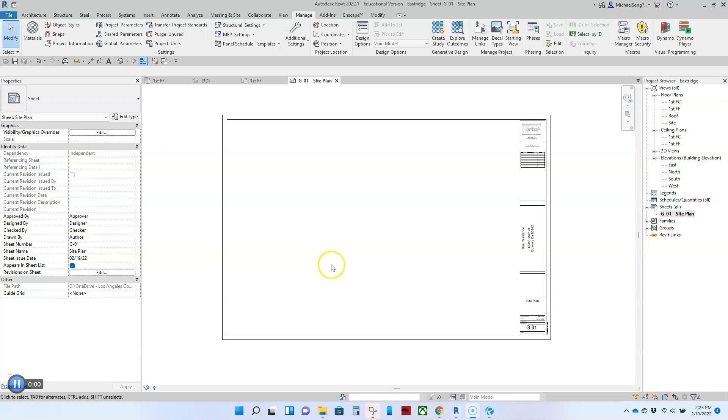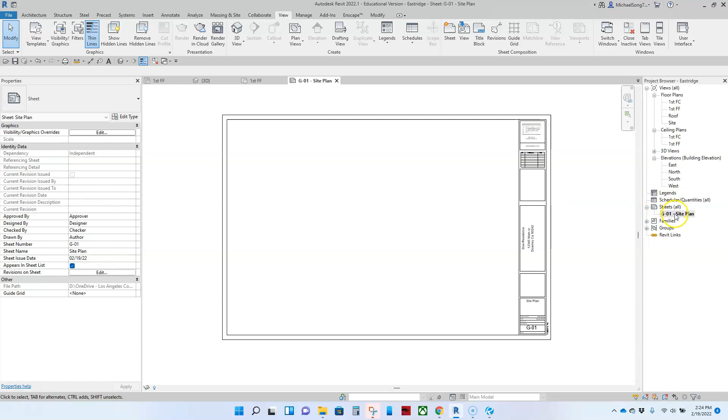All right guys, before we go further, let's get more sheets here because a typical architectural project is going to have 10 to 15 sheets of paper. Instead of having to go to View, Sheet, and then load a title block over and over again, we've already done it. So you just right click here and go to duplicate with detailing, or empty sheets. What detailing does is if you have other drawings in here, it'll duplicate that too, but you don't want that anyway.

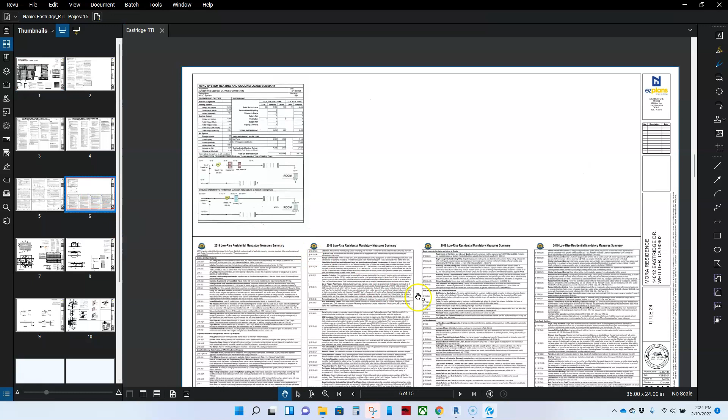So it's just populating G1, G2, G3, G4. I think typically here, if you look at our title block or the sample drawings I gave you, how many G series do I have? Yeah, I have like G1, 2, 3, 4, 5, 6. I have like 6 G series sheets. So let me create a few more.

What's really nice doing it this way is that the numbers go sequentially, right? 1, 2, 3, 4, 5. And of course, I can change the name of the sheet, which I'll do at another time. But now I have 6 new sheets. Let me actually go back here.

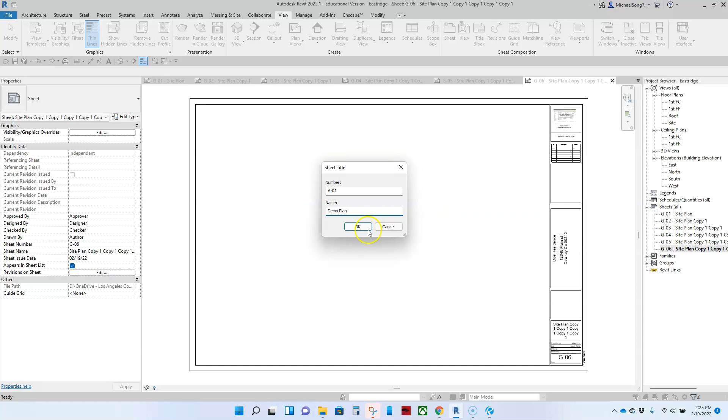I'm going to rename that, and then the architectural series will start as A01, A02. And then that might be a demo plan. Of course, the names are all interchangeable. So you got the A series here, and again I can just start to duplicate that. So you got A02 — at least it starts off some of my work. 2, 1, 2, 3, 4, 5, 6.

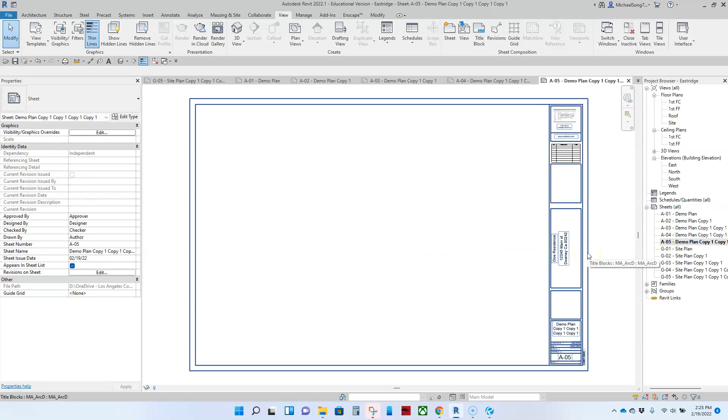All right, enough of that. And I guess we'll add more sheets as necessary for this particular project.

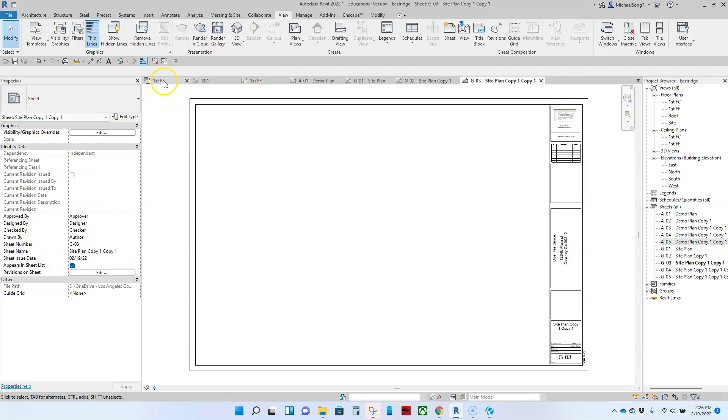Oh man, all my sheets are open. Oh, so here's another shortcut — I now have a good, lots of sheets open here. This actually happens a lot in Revit because you're looking at multiple views, multiple sheets on the same project. If you get to a point where you have too many tabs or windows open, just select one window that you want to keep and hit this button here, which will close all the other views that you're not using. So then it just kind of closes them. But of course, you can reopen them again by clicking on them and so on.

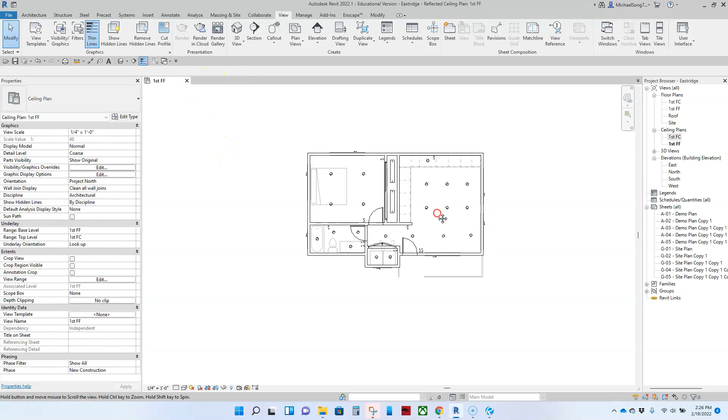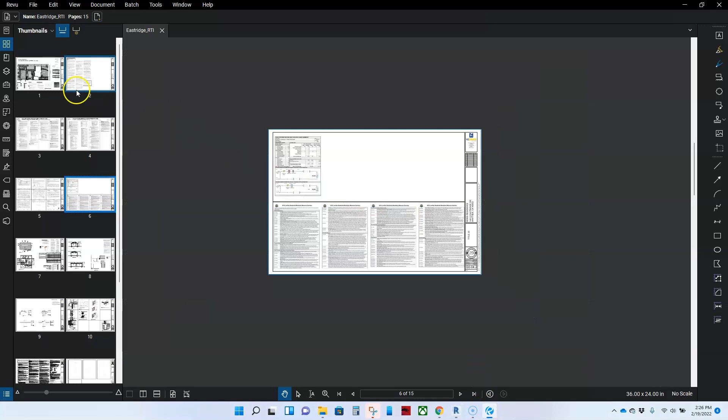All right, so let's continue on with our site plan here. This is where we're going to create our cover sheet, if you will. Let's look at our sample, and we want to try to mimic this. So we know we're going to have a site plan here, we're going to have the project title, the project address. But remember guys, we have the project title and project address here, and we don't want to have to repeat information, right? We don't want to have to copy paste things if we don't have to.

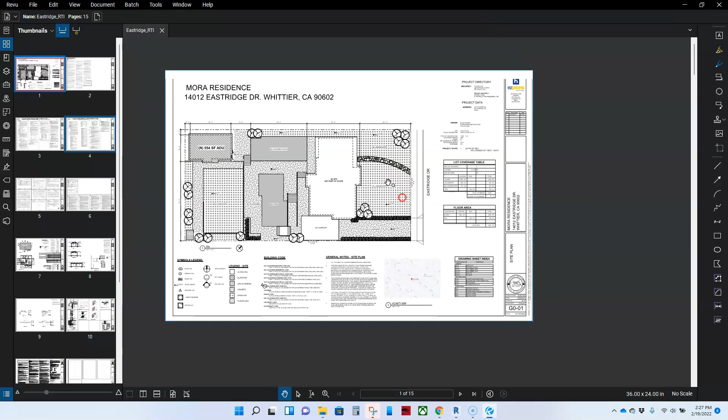So again, if I put in a label here, it'll be done automatically. Let's put a project title and project address here, but we don't want to retype it because the information is already there.

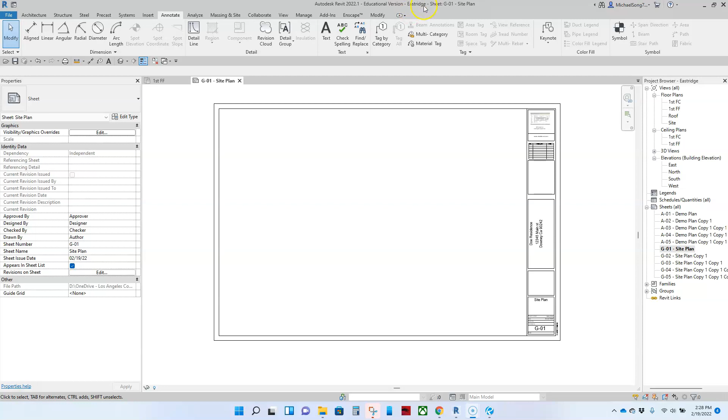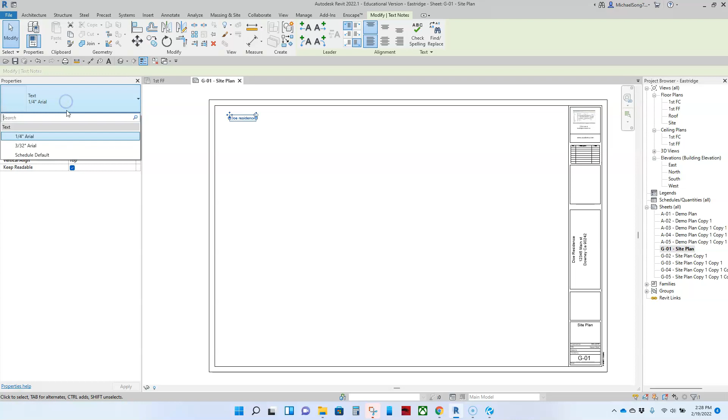But you notice on this file, we're at the actual project folder here. If I go to Annotate and go to Text, I don't have the ability to put a label, meaning that if that's the case, then I just got to type 'Doe Residence' and put it here. And if the text is too small, of course I could make the text bigger, which we should do in a second. But long story short, this is just regular text and I have to retype it, which is not a killer if I just have to do it on this one sheet.

But in an office, you might need a cover sheet on every project, and you don't want to have to retype things on every project. So the best thing to do is to have another title block. In my office, we have 2 different types of title block.

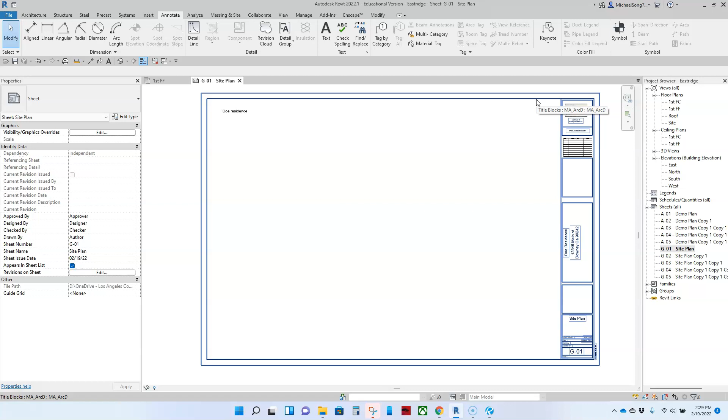We have a title block just for the cover sheet, and then we have a regular title block. So I'm going to now modify this to be my cover sheet title block.

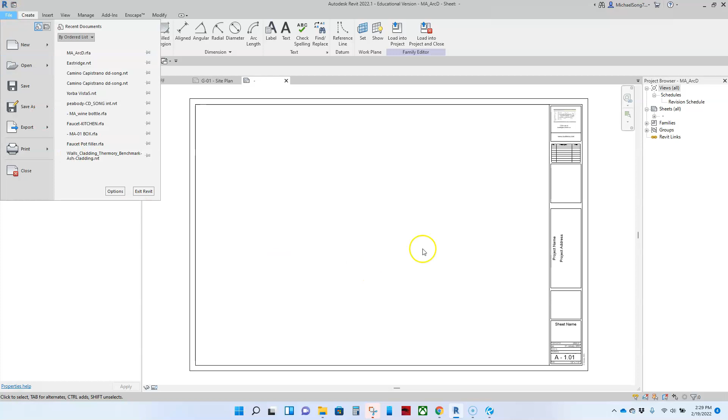All right, so let me erase this and stay with me, guys. So I'm going to click the title block. We're going to go to Edit Family. And what we're going to do is we're going to do a Save As right away because I don't want to affect this title block. Let me get out again and take it slow. Again, this title block, which is MA-ARC-D, all my sheets have that title block, MA-ARC-D. So if I make a change into this title block, all of these things will change, right?

So what I want to do is I want to take my MA-ARC-D title block and do a Save As. And I'll save it into my same custom families folder. And then this time I'll say MA-ARC-D underscore cover. All right, so this is a brand new family now, and it's not loaded onto my Eastridge project yet.

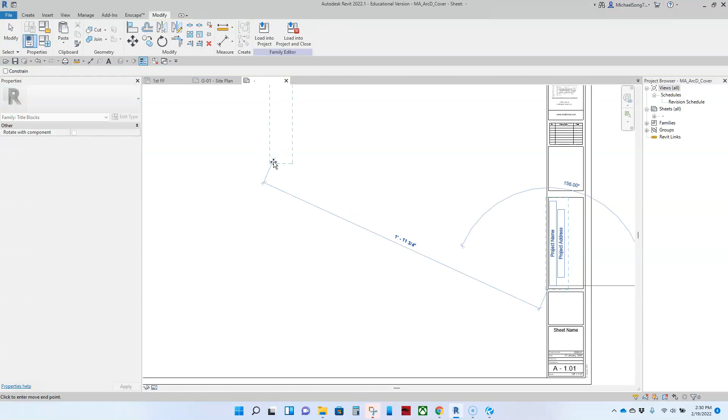So this is where I want to set it up so that this is the title block that I will use for my cover sheet. So I'm going to take this project name and project address here, Control C, and then Control V. I'm basically making a copy of it. I'm going to rotate this thing.

And I want my project name to show up here, my project address to show up here. And in this case, I want that label to be much larger. So right now it's at 1/4 inch, but maybe I want to show up really big, like 1/2 inch, right? So this is where we're going to also teach you how to add larger text or different text styles.

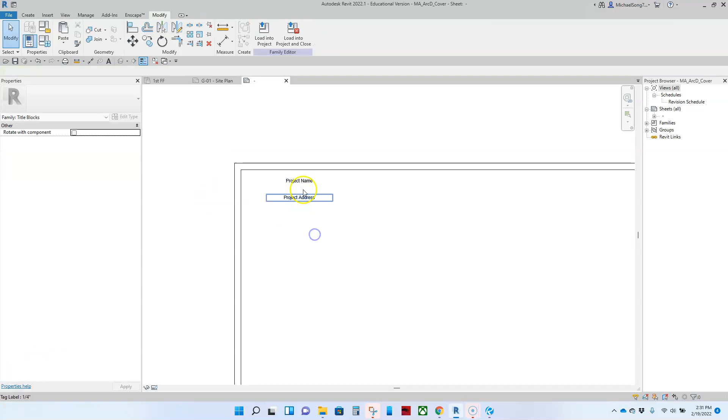So if you look at this label that I selected, right? And of course, if I go to edit here, it's asking me what information do I want to add to this label. I already have project name, so I don't want to change that, but I just want to make it bigger, the label, not the text. So if I click this, right now that label is called 1/4 inch. And then if I come down here, I can pick a label that's 1/8 of an inch, or 3/8, which is actually pretty big. But they don't have a 1/2 inch.

So we're going to create a 1/2 inch label. Well, how do we do that? You select the label, you go to edit type. So I want to select that, edit that label. And then I'm going to duplicate it. And I'm going to name this 1/2 inch, which in my mind represents 1/2 of an inch, the text size. Oop, my number lock was off. Sorry, guys.

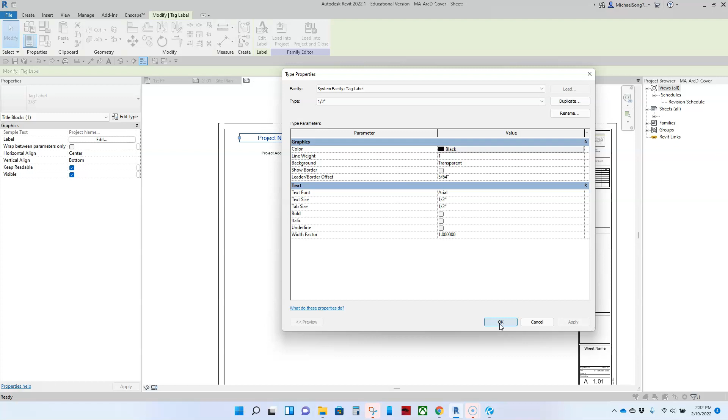And so what I'm telling Revit is that if I want this type of label, I want my text size to be 1/2. Right? So here's all the other labels that I have by default, right? 1/4 inch, 1/8 inch, 3/8. So if I go to 3/8, you'll see that changes to 3/8. If I go to 1/2, I just inputted 1/2, so I changed that to 1/2. All right? So I created a brand new label, and I'm making that label have a text size of 1/2 an inch tall.

So there it is. I have project name, project address. I want that to be a 1/2 inch also. And in this case, I want this guy to be left justified, and that guy also to be left justified. And I want my address to get along that way, and we're good to go.

All right, so let's just take it one step at a time. And at this time, I'm not going to close it because I know I'm going to come back to this and edit it further. So I'm just simply going to load it onto our project.

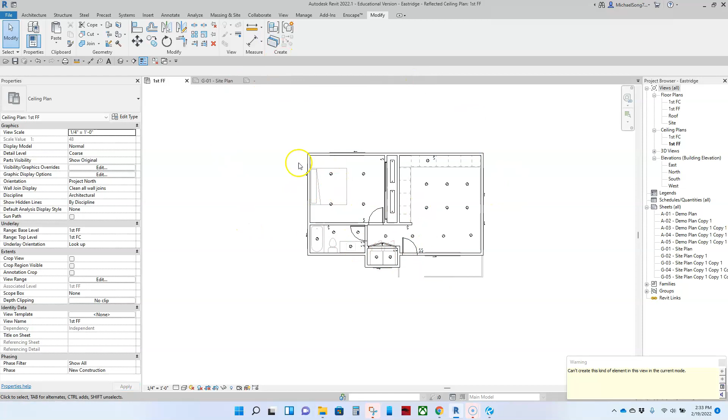It should be in my sheet view, not my model view. All right, so here it is, on this one.

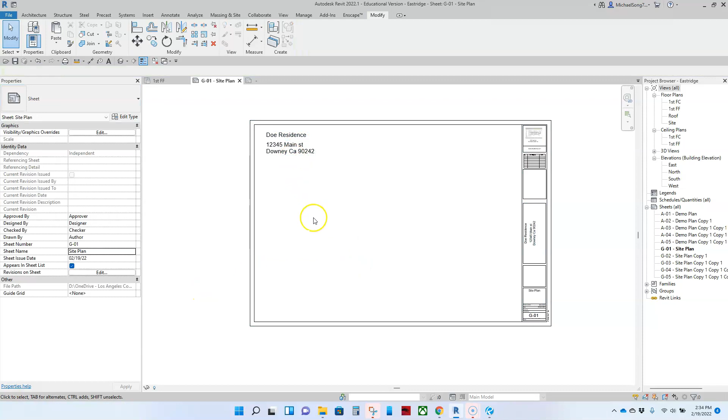If I come here, you'll notice that's my original ARC-D. But remember, I loaded a new family called ARC-D cover, I believe. So if I click this, here it is. It shows up right here. So now this automatically gets populated, the residence info and so on. Now we have to go back and see what other information we want on our title block.

So we have that. We're going to work on symbol legend text later. Over here on the project data, this is going to be static, right? This is your company. But this part, you can pull that information because that's the project address.

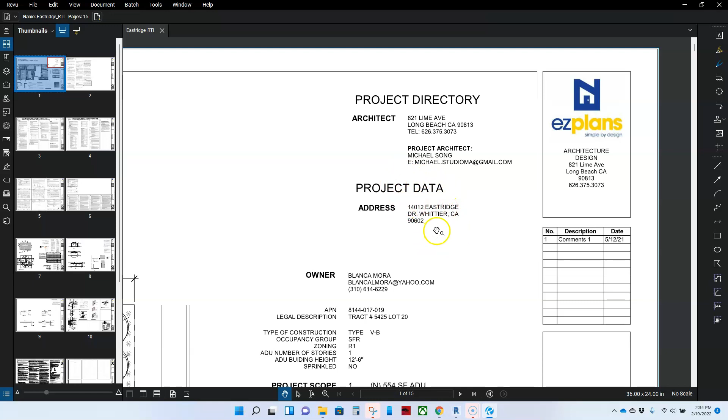So let's just kind of focus on this part here. The way how I would do that is, again, I will go back to the title block. So I'm changing my cover title block, and I'm going to start typing just regular text, 3/32. Yeah, no, I want it to be maybe a 1/4 inch.

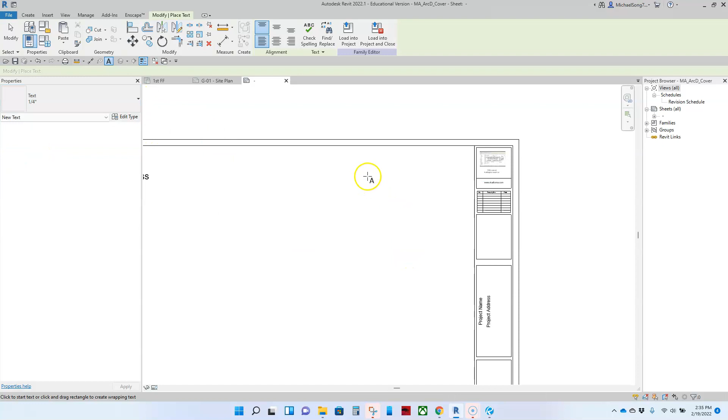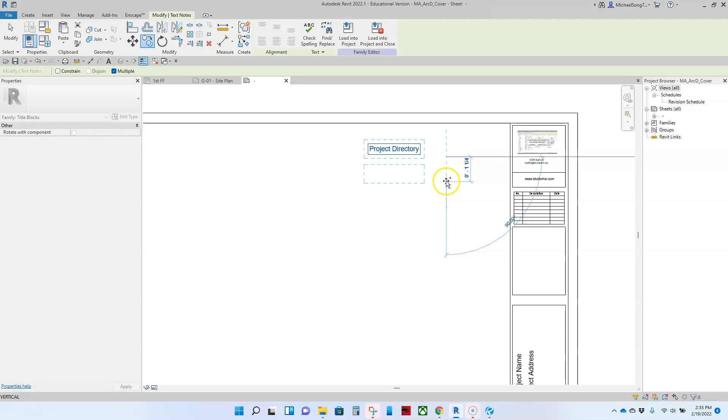And I'll put project, what is it, project what? Project directory. Excuse me if I misspell things at this moment, but I'm just going to keep going. And then here I can copy that, and then it'll be my office name.

I'll make that a little bit smaller, like an 1/8. And it'll be, you know, architect. You know what? I think I'm going to do it this way. What else do I have here? Architect, my address, and project architect. Okay.

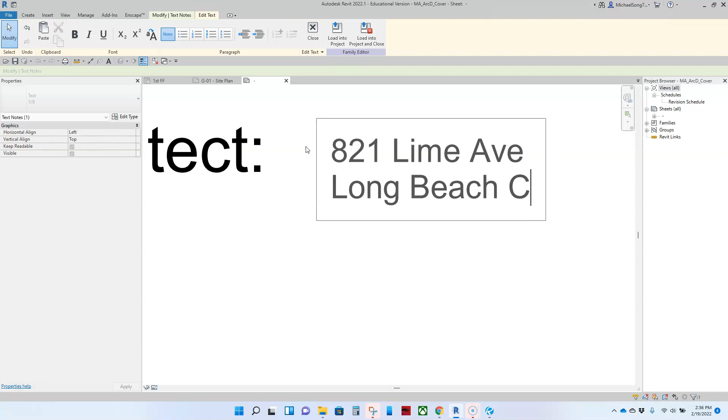So I'll put this in a separate text box here. And of course, because this information never changes, right? So this is where you want to put static text. 821 Lime Avenue. You know, phone number, and et cetera, et cetera, et cetera, right?

So that's what you want to do. And I'm not going to fill in all the information, but I'd like you guys to fill in every bit of information, just like the way you see it on the handout. And then we're going to say here, project address. Actually, probably want my client name. Client name, project address, etc., etc. We want this one to be right justified.

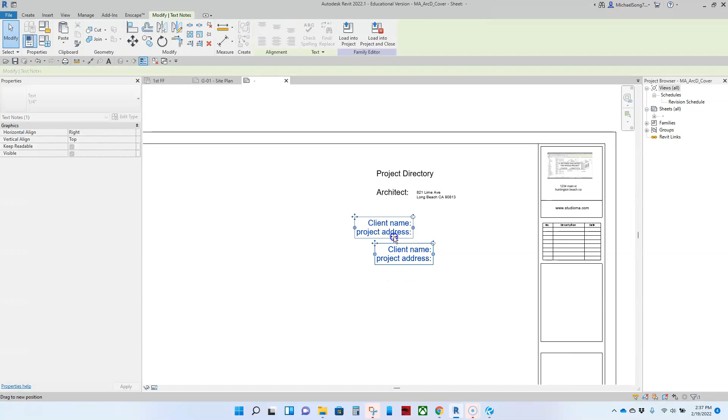And then somewhere here, and I should make that right justified also. And then it'll just kind of lock in. So Revit's pretty nice, it'll give you guidelines or virtual guidelines.

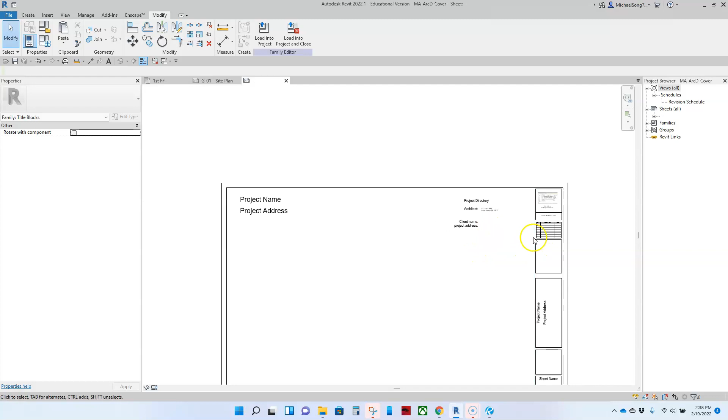Again, I expect you guys to put in all this information as much as possible, just as practice, okay? But I'm just going to cut it short. So this is my base. None of this information will change, but my client name will change depending on where I put this family into a new project. So I don't want to have to rewrite any of that stuff.

My project address, again, this is a project address label. This is a project address label, so I can copy any one of these things. But if you wanted to make your own from scratch, instead of copying and pasting, this is what you would do. You would say label, and then say I want my label right here. And then it's asking me, what do you want to label, right? This would be project address.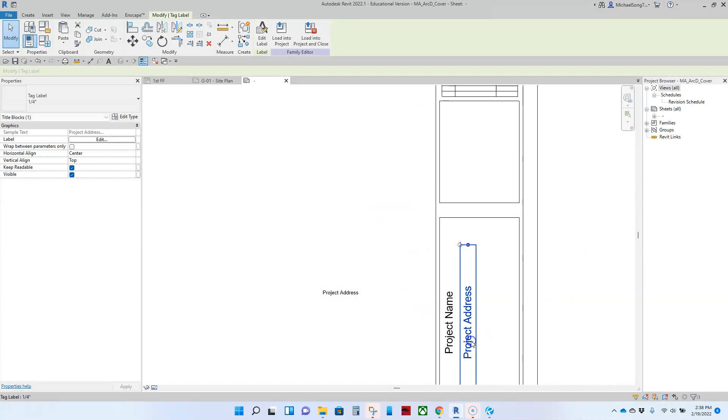Insert that in, so there you go. So now I have a project address here and here. These two are the same thing, guys, just remember that. It's drawing from the same information. So I have project address and the text is 1/4 inch. I just want to make sure my label is 1/4 inch. Yeah, so that's how you create an address, a label, from scratch.

But I'm just going to copy this now. And I'm going to make this label not show the project address by going to edit. But I want to show client name instead. So there you go. Again, I'm going to keep this open, but I'm simply going to load this into my project.

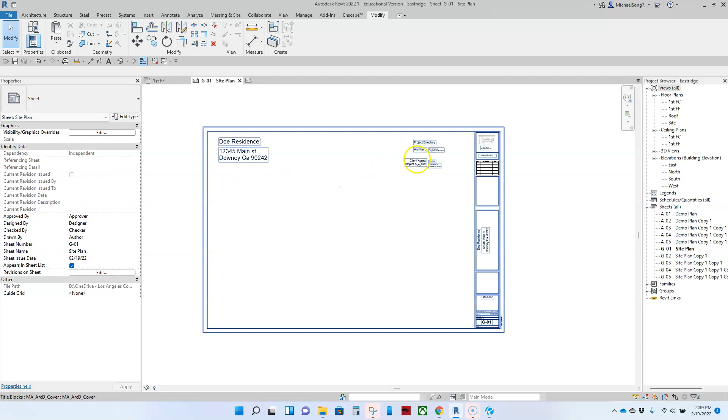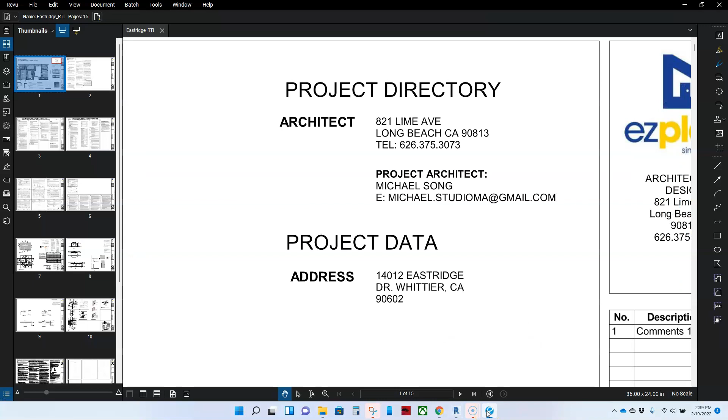And then come here, and here it is. So client name, John Doe, project address, blah, blah, blah. These were text, remember? So those were static. So I think I'm going to stop my demo here, and we'll see you on the next video.